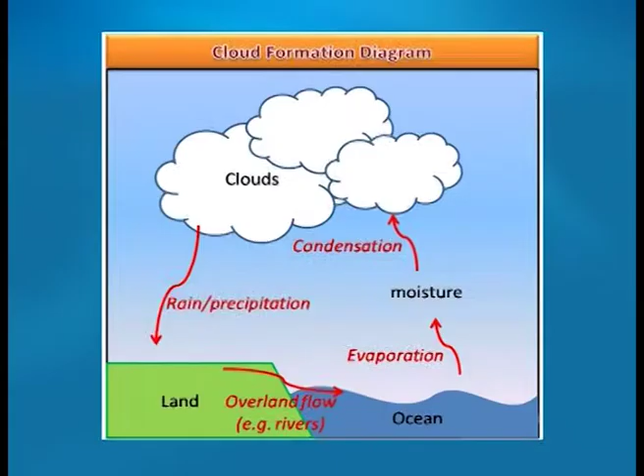Hydropower is a renewable energy resource because it uses the Earth's water cycle to generate electricity. Water evaporates from the Earth's surface, forms clouds, precipitates back to Earth, and flows towards the ocean. The movement of water as it flows downstream creates kinetic energy that can be converted into electricity.

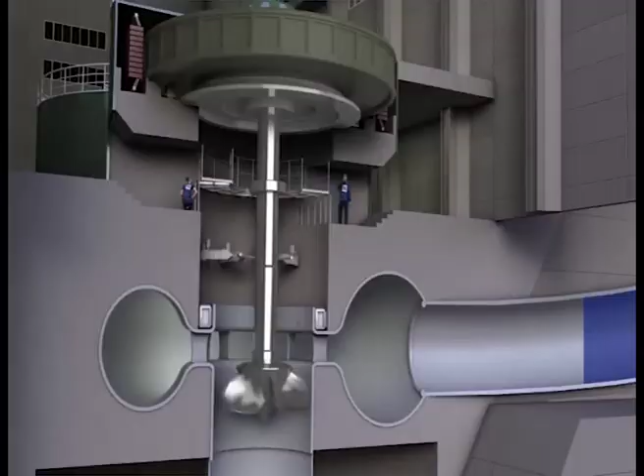On a worldwide standpoint, it is the most widely used form of renewable energy. Hydropower has been used for centuries by humans. Electricity is typically created when water is passed over large mechanical turbines. The water pressure forces the turbines to turn, and the mechanical energy created is then converted into electricity.

Hydropower has now become the best source of electricity on Earth. History proves that the cost of this electricity remains constant over the years. Because of the many advantages, most countries now have hydropower as a major source of electricity production.

The following aspects are highlighted in this lesson: hydroelectric power, and the potential of India in hydroelectric power.

Hydroelectric power is a renewable resource. The present installed capacity for hydroelectric power, as on September 30, 2013, is approximately 39,788.40 megawatts, which is 17.39% of total electricity generation in India.

Other renewable resources include geothermal, wave power, tidal power, wind power and solar power. Hydroelectric power plants do not use up resources to create electricity, nor do they pollute the air, land or water as other power plants may.

Hydroelectric power has played an important part in the development of this nation's electric power industry. Both small and large hydroelectric power developments were instrumental in the early expansion of the electric power industry.

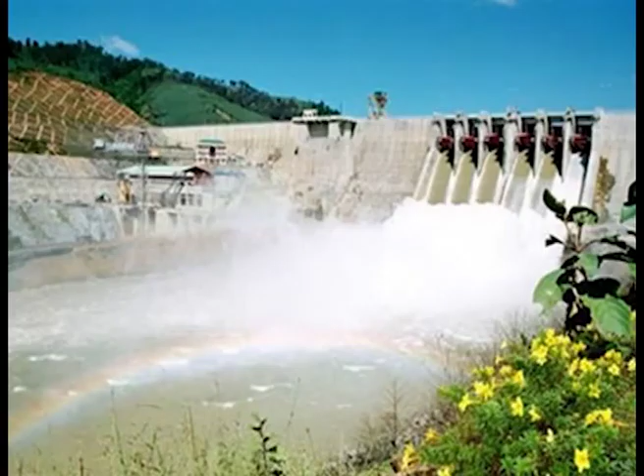Hydroelectric plants do not create air pollution. The fuel, falling water, is not consumed. Projects have long lives compared to other forms of energy generation. These favorable characteristics continue to make hydroelectric projects an attractive source of electric power.

Operating principles of hydroelectric power: hydroelectric power comes from flowing water, winter and spring runoff from mountain streams and clear lakes. The movement of water as it flows downstream creates kinetic energy that can be used to turn turbines and generators that produce electricity. The capacity to produce this energy depends on both the available flow and the height from which it falls.

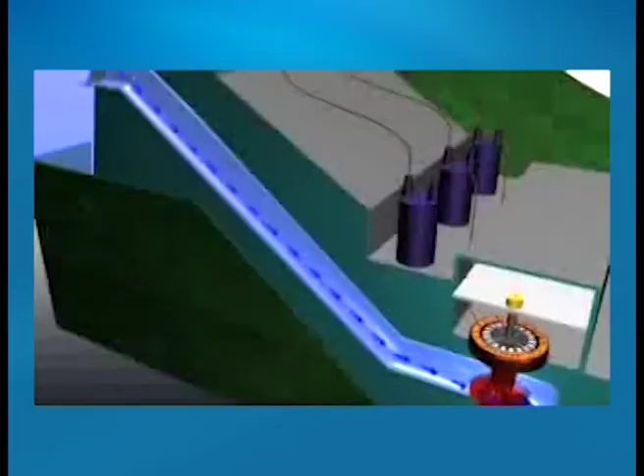The most common type of hydroelectric power plant uses a dam on a river to store water in a reservoir. Water released from the reservoir flows through a turbine, spinning it, which in turn activates a generator to produce electricity. But hydroelectric power doesn't necessarily require a large dam.

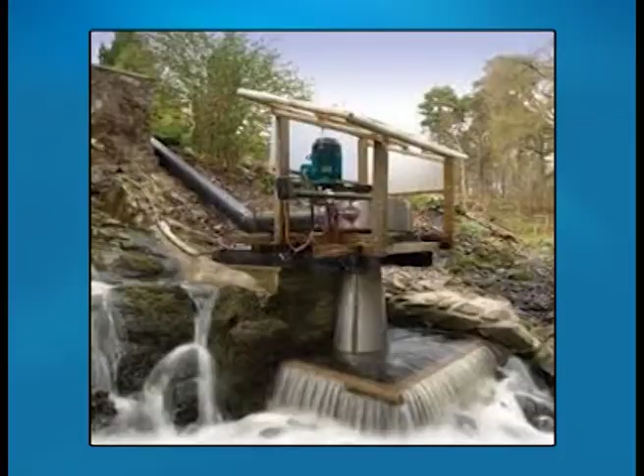Some hydroelectric power plants just use a small canal to channel the river water through a turbine. Another type of hydroelectric power plant, called a pumped storage plant, can even store power.

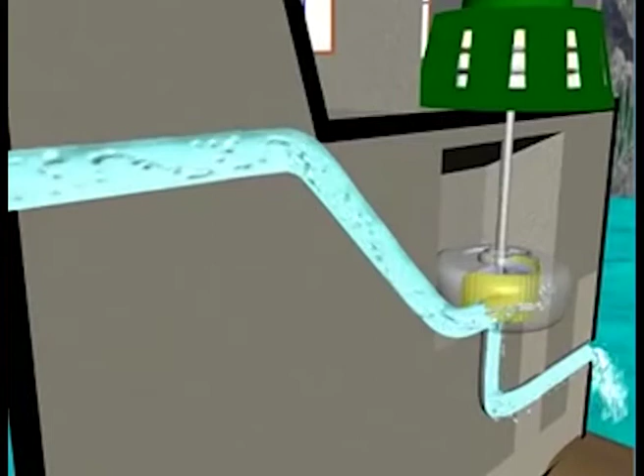The power is sent from a power grid into the electric generators. The generators then spin the turbines backward, which causes the turbines to pump water from a river or lower reservoir to an upper reservoir, where the power is stored.

To use the power, the water is released from the upper reservoir back down into the river or lower reservoir. This spins the turbines forward, activating the generators to produce electricity. A small or micro hydroelectric power system can produce enough electricity for a home, farm or ranch.

Hydroelectric power generation takes place at facilities called hydroelectric power plants. Some power plants are located on rivers, streams and canals, but for a reliable water supply, dams are needed.

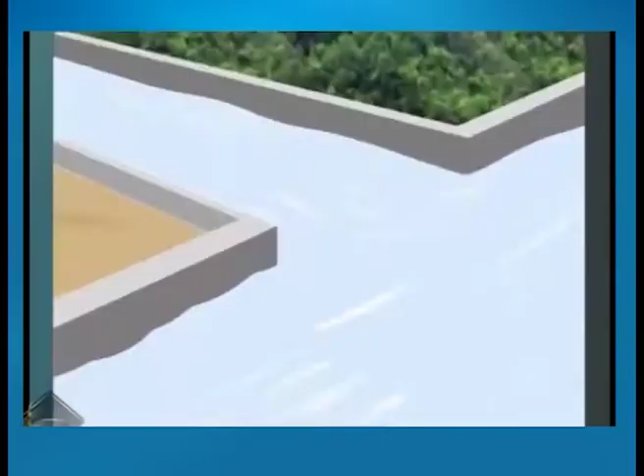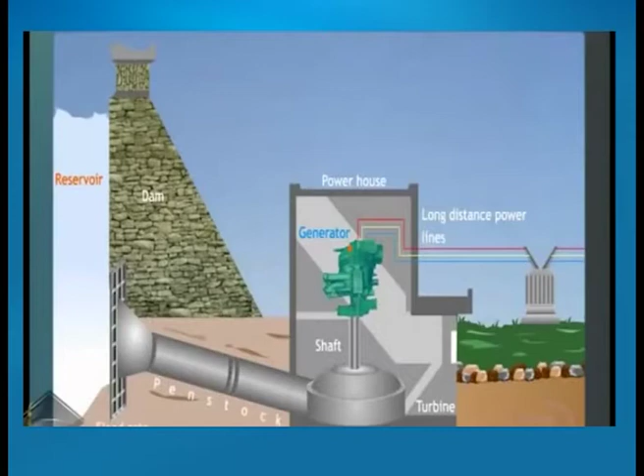Dams store water for later release for such purposes as irrigation, domestic and industrial use, and power generation. The reservoir acts much like a battery, storing water to be released as needed to generate power.

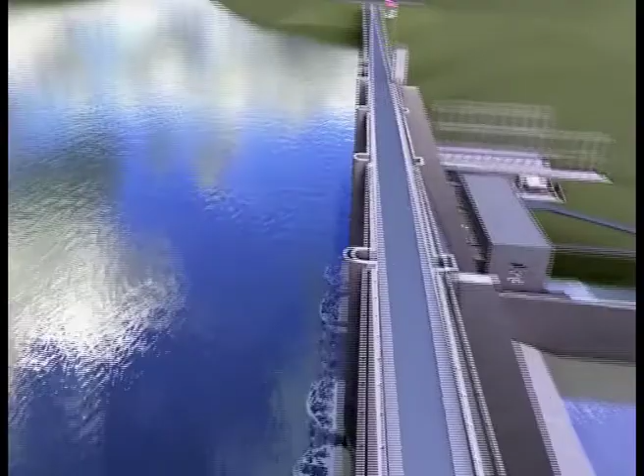To generate electricity, water must be in motion, since water is the initial source of energy. We call this hydroelectric power, or hydropower for short. The dam creates a head, or height, from which water flows. A pipe, called a penstock, carries the water from the reservoir to the turbine.

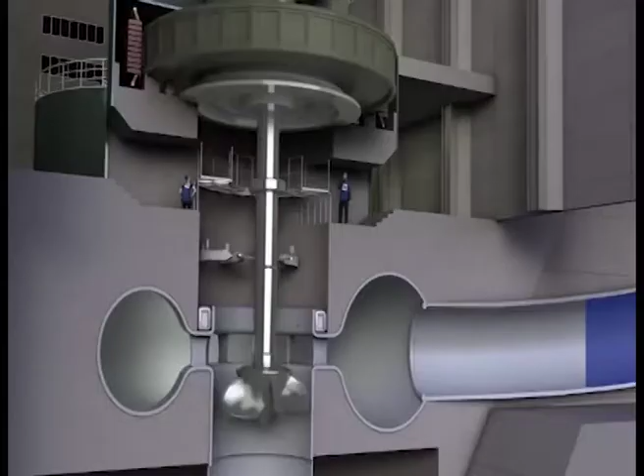The fast moving water pushes the turbine blades, something like a pinwheel in the wind. The water's force on the turbine blades turns the rotor, the moving part of the electric generator. When the coil of wire on the rotor sweeps past the generator's stationary coil, the stator, electricity is produced.

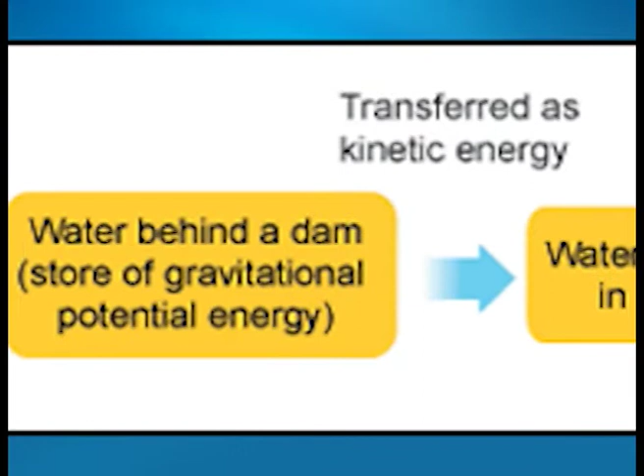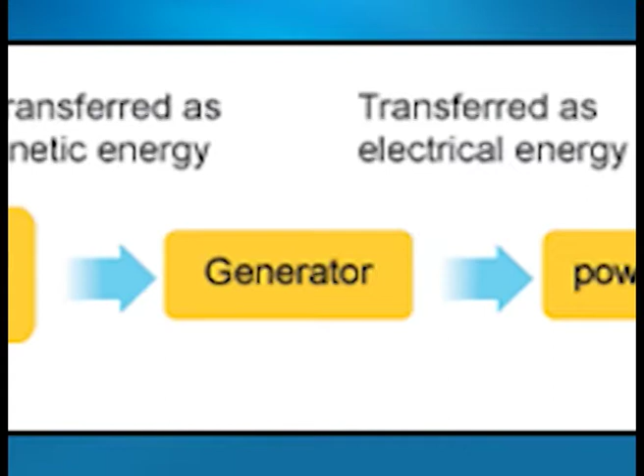The water flowing in the river possesses two types of energy: kinetic energy due to the flow of water, and potential energy due to the height of water. In hydroelectric power plants or dams, the potential energy of water is utilized to generate electricity.

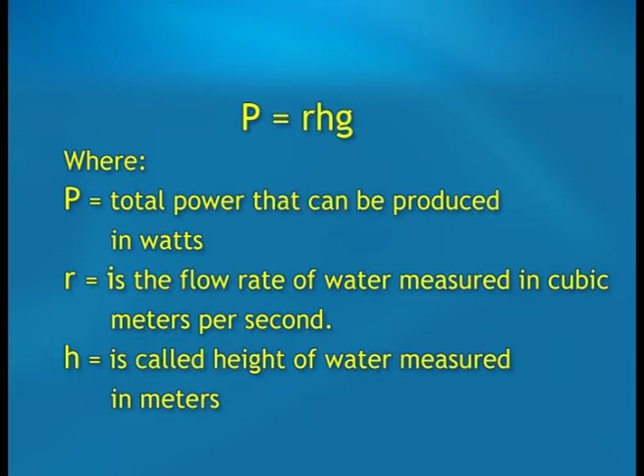The formula for total power that can be generated from water in a hydroelectric power plant due to its height is given by P equals RHG, where P is the total power produced in watts, R is the flow rate of water measured in cubic meters per second, and H is the height of water measured in meters. It is also called the head of water.

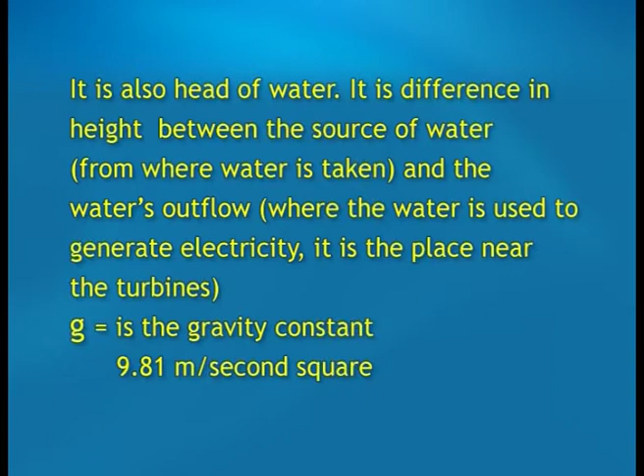It is the difference in height between the source of water, from where water is taken, and the water's outflow, where the water is used to generate electricity. It is a place near the turbines. G is the gravity constant, 9.81 meters per second squared.

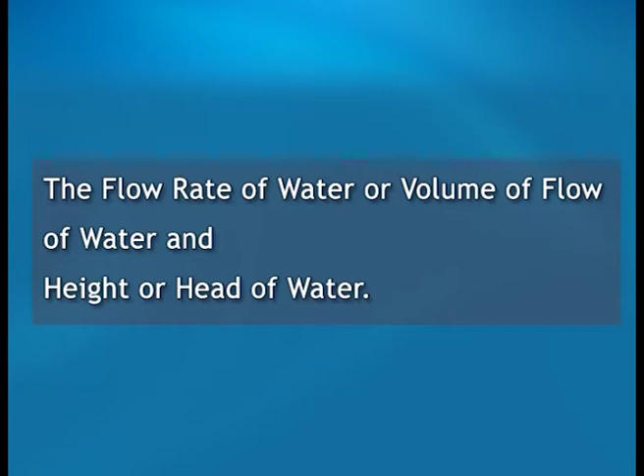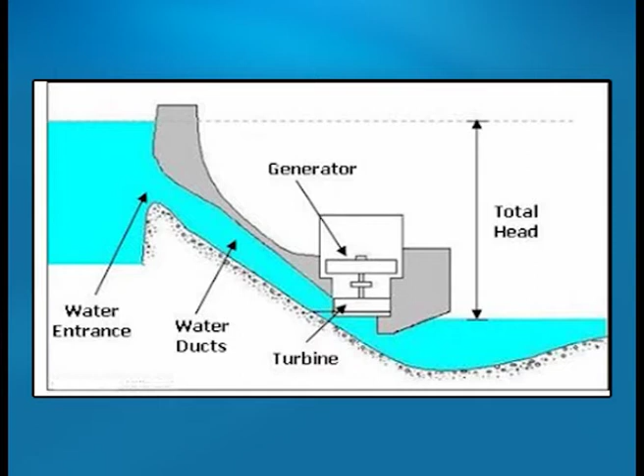The formula clearly shows that the total power that can be generated from hydroelectric power plants depends on two major factors: the flow rate or volume of water, and the height or head of water. The more the volume of water and the more the head of water, the more power is produced.

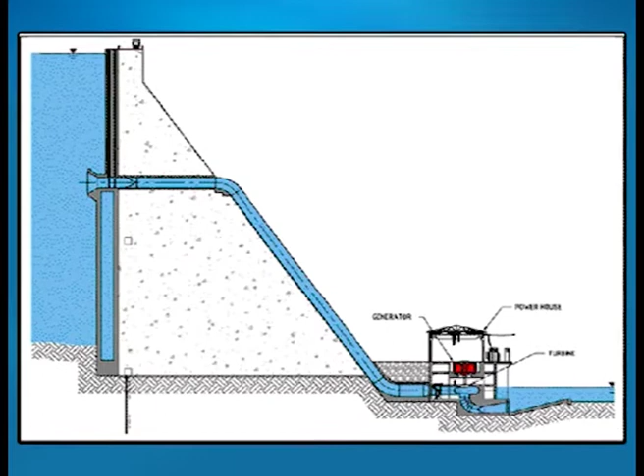To obtain a high head of water, the reservoir should be as high as possible and the power generation unit should be as low as possible. The maximum height of the reservoir is fixed by natural factors like the height of the river bed, the amount of water, and other environmental factors.

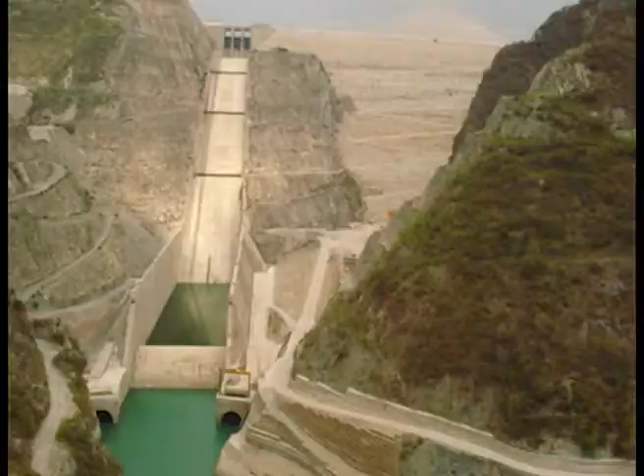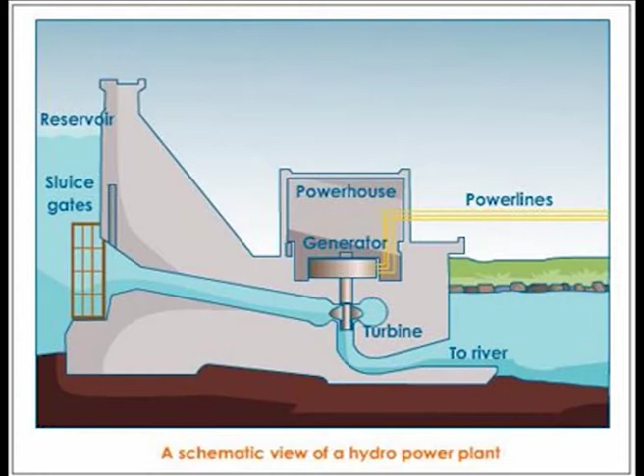The location of the power generation unit can be adjusted according to the total amount of power to be generated. Usually it is constructed at levels lower than ground level to get the maximum head of water. The total flow rate of water can be adjusted through the penstock as per requirements. If more power is to be generated, more water can be allowed to flow through it.

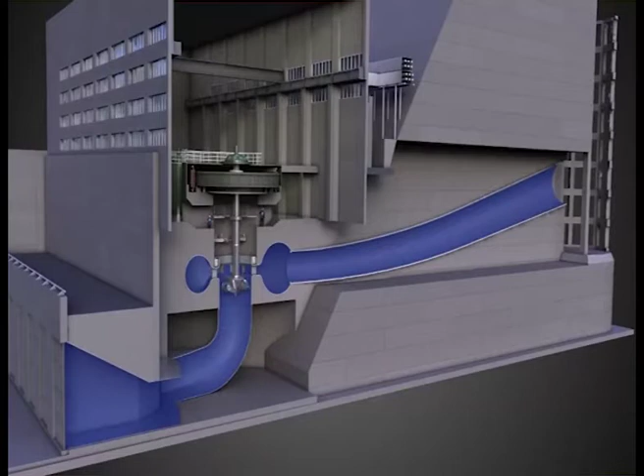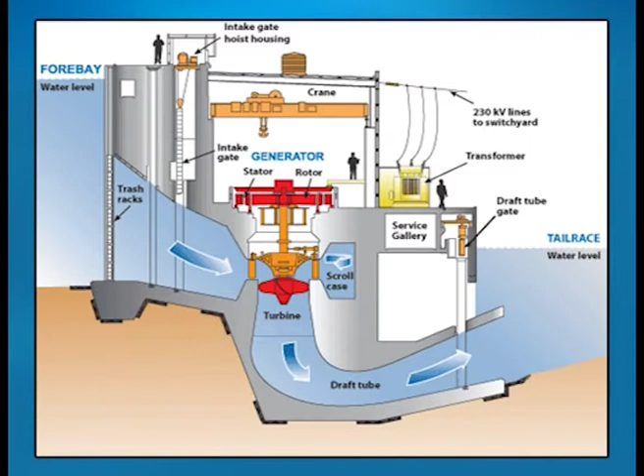Once electricity is produced, it must be delivered to distant locations such as offices and factories. Dams are often in remote locations, so power must be transmitted over some distance to its users. A vast network of transmission lines and facilities brings electricity to us in a usable form. All electricity made at a power plant first goes through transformers, which raise the voltage so it can travel long distances through power lines.

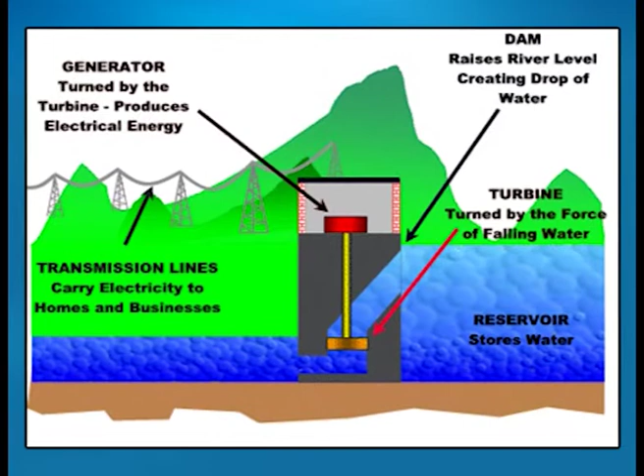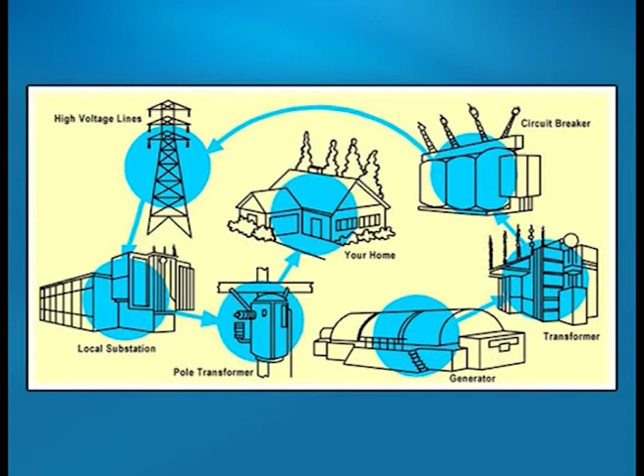Voltage is the pressure that forces an electric current through a wire. At local substations, transformers reduce the voltage so electricity can be divided up and directed throughout an area.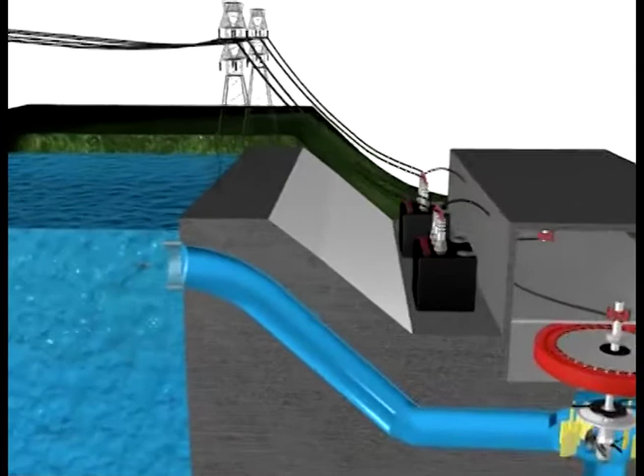Most hydroelectric power comes from the potential energy of dammed water driving a water turbine and generator. The power extracted from the water depends on the volume and on the difference in height between the source and the water outflow. This height difference is called the head. The amount of potential energy in water is proportional to the head.

To deliver water to a turbine while maintaining the pressure arising from the head, a large pipe called a penstock may be used.

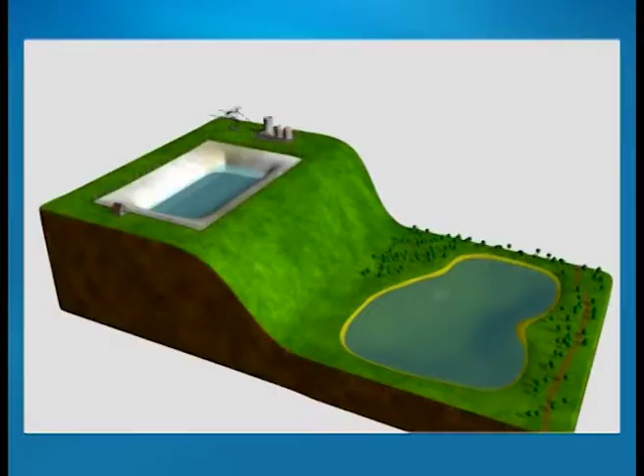This method produces electricity to supply high peak demand by moving water between reservoirs. At times of low electrical demand, excess generation capacity is used to pump water into the higher reservoir. When there is higher demand, water is released back into the lower reservoir through a turbine. Pump storage schemes currently provide the most commercially important means of large-scale grid energy storage and improve the daily capacity factor of the generation system.

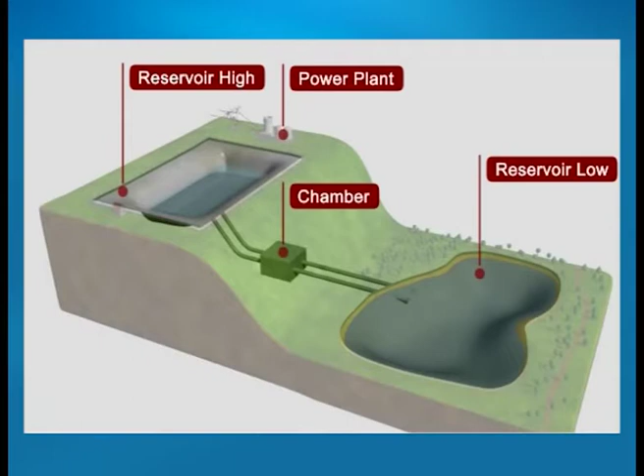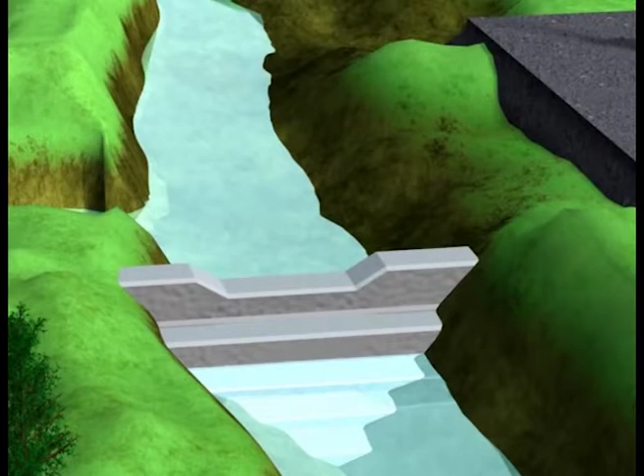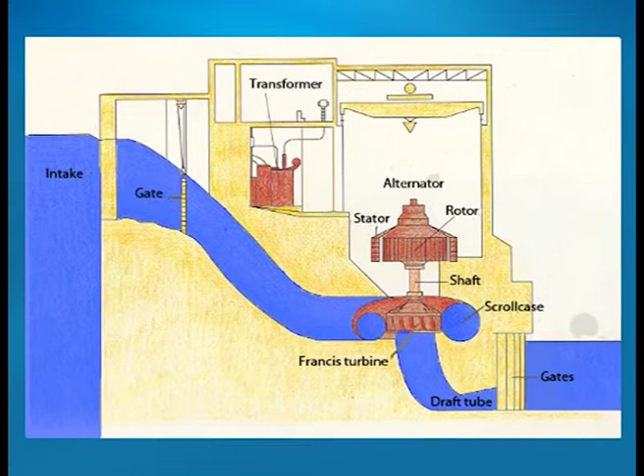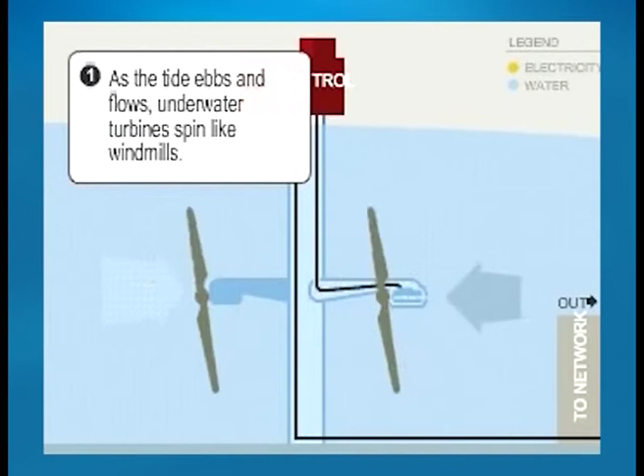Run-of-the-river hydroelectric stations have comparably smaller reservoir capacities, making it impossible to store water. A tidal power plant makes use of the daily rise and fall of water due to tides. Such sources are highly predictable, and if conditions permit, construction of reservoirs can also be dispatchable to generate power during high demand periods. Less common types of hydro schemes use water's kinetic energy from undammed sources, such as undershot water wheels.

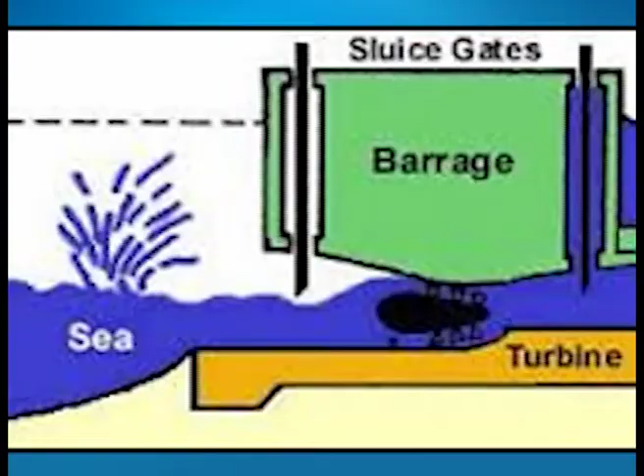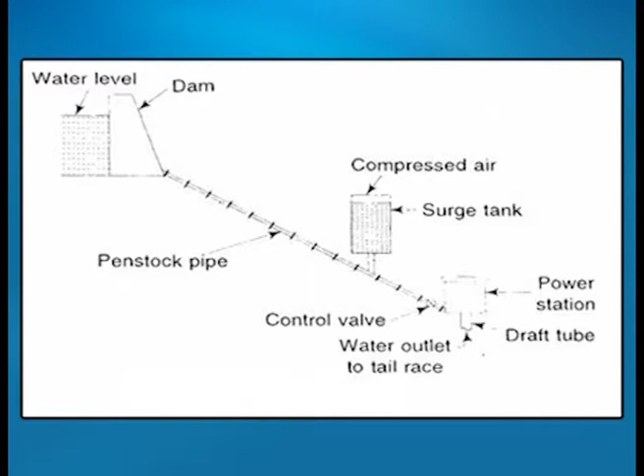Layout of hydroelectric power plants: the major components are the dam, barrage, and headworks, including power intake, head regulator, and desilting chambers; the head race tunnels or channels; the surge shaft or surge chambers; the pressure shaft or penstock; the underground and surface powerhouse; and the tail race channel or tail race tunnel.

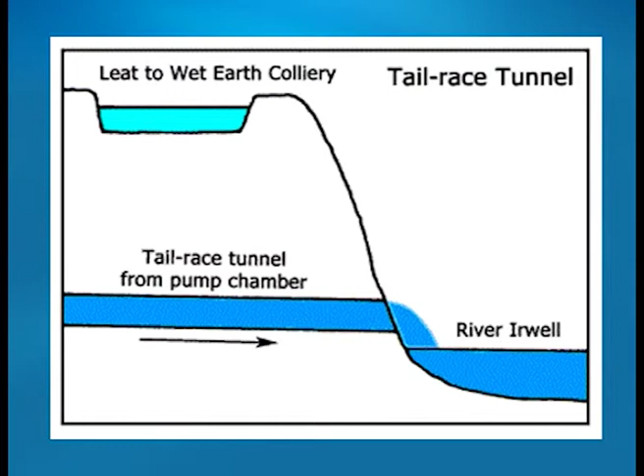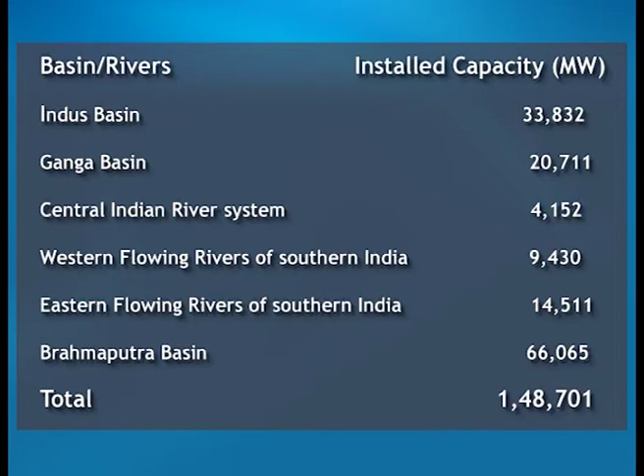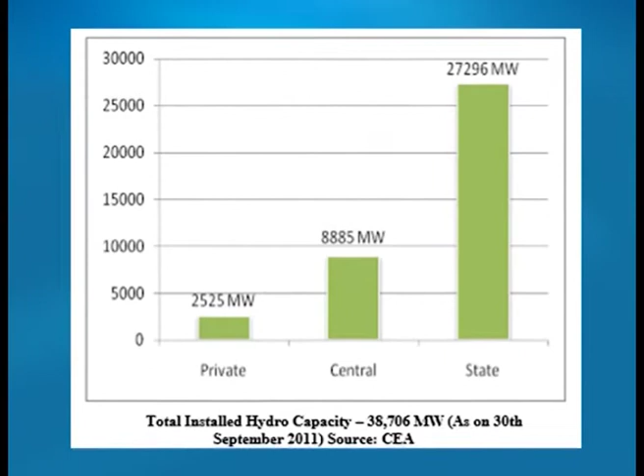Hydroelectric power: India has vast hydropower potential of over 84,000 megawatts, with the Brahmaputra, Indus and Ganges basins contributing about 80% of this total. India has harnessed only about 15% so far, another 7% is under various stages of development, and the balance 78% remains unharnessed due to many issues and barriers.

As on 1st October 2013, the hydropower potential in terms of installed capacity is estimated at 1,48,701 megawatts, out of which 1,45,320 megawatts of the potential consist of hydroelectric schemes having installed capacity of above 25 megawatts.

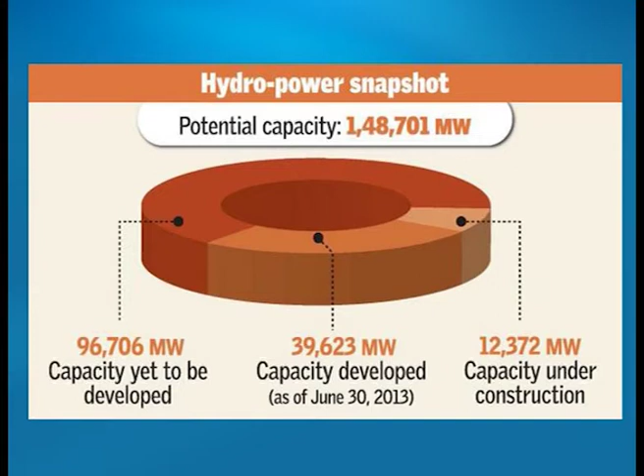Out of the 1,48,701 megawatts estimated potential of hydropower in the country, 39,788 megawatts is in operation as on 1st October 2013, which constitutes about 27% of the estimated hydropower potential and 17% of the total installed power capacity of the country, which stands at 2,28,722 megawatts. Hydropower in India.

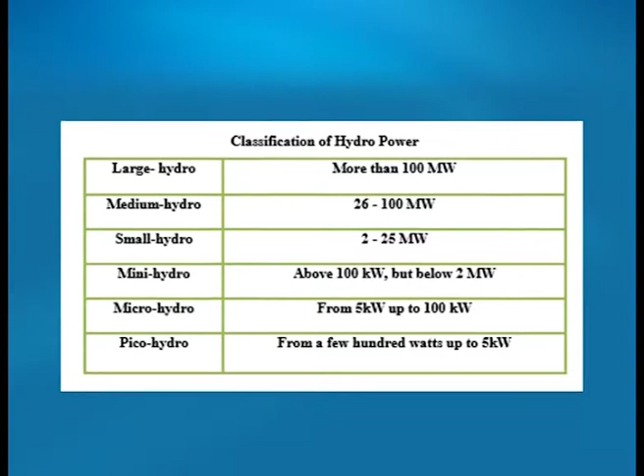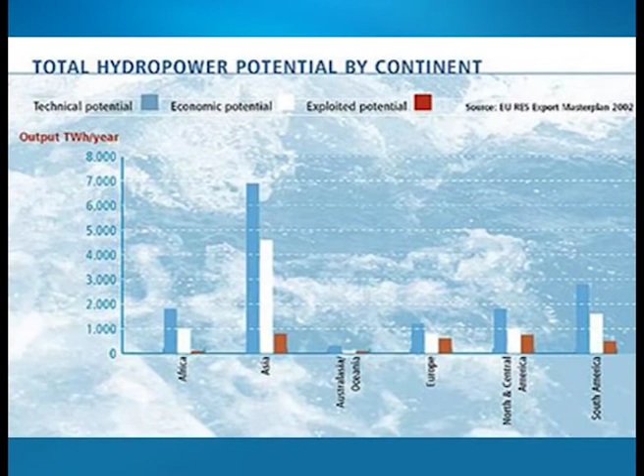India is blessed with an enormous amount of hydroelectric potential and ranks 5th in terms of exploitable hydro potential on the global scenario. As per assessment made by the Central Electricity Authority, India is endowed with economically exploitable hydropower potential to the tune of 1,48,700 megawatts of installed capacity.

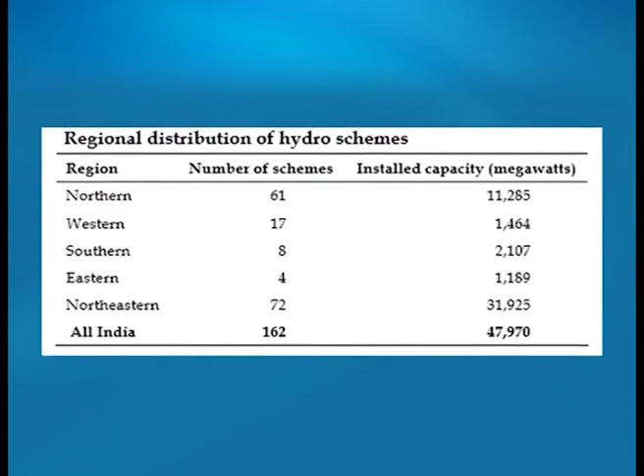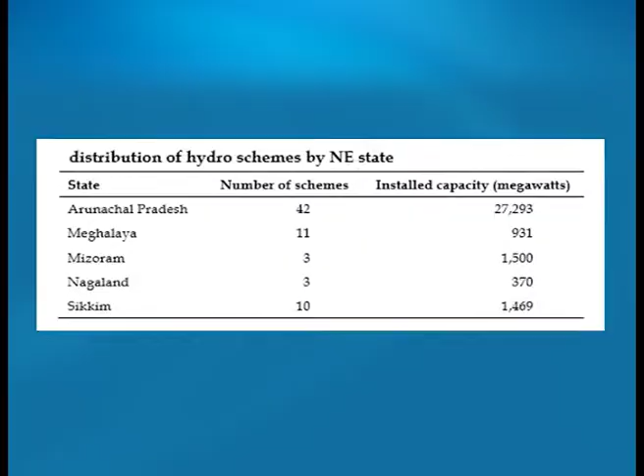India's hydropower system is divided into 5 major regions, namely the Northern region, Western region, Southern region, Eastern region and Northeastern region, with each region facing separate issues. The Eastern and Northeastern regions are power abundant, while the Northern and Western regions have greater power demands.

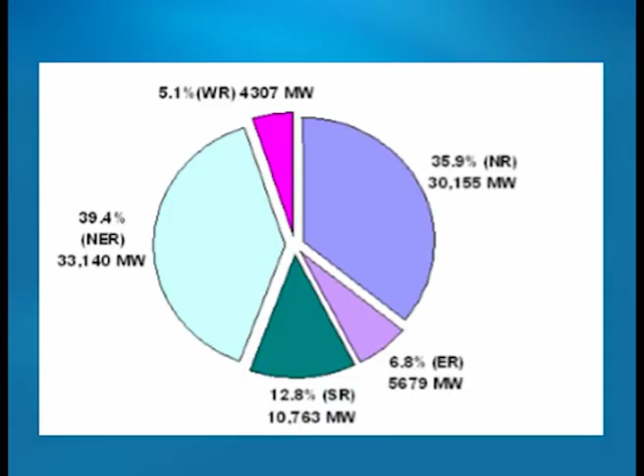The hydropower potential is largest in the Northeastern region, with 98% of it still untapped. The Northern, Eastern, Western and Southern regions have 79%, 77%, 23% and 33% unexploited hydropower potential respectively. A large part of the hydroelectric projects are concentrated in the northeastern states due to the availability of water and the required topography, but the demand for power in these areas is not significant.

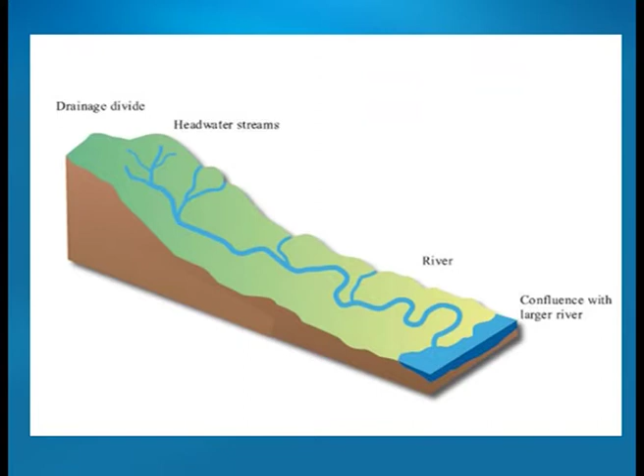River basins and their power potential: In basins, the water converges to a single point inside the basin known as a sink, which may be a permanent lake, dry lake, or a point where surface water is lost underground. The basin includes both the streams and rivers that convey the water as well as the land surfaces from which water drains into those channels, and is separated from adjacent basins by a drainage divide. The basin acts as a funnel by collecting all the water within the area it covers and channeling it to a single point. Each basin is separated topographically from adjacent basins by geographical barriers such as a ridge, hill or mountain.

Godavari Basin extends over an area of 3,12,812 square kilometers, which is about 9.5% of the total geographic area of the country. It is surrounded by the Satmala Hills, the Ajantha Range and the Mahadev Hills on the north, the Western Ghats on the west, and the Eastern Ghats on the east and south. The basin lies in the states of Maharashtra, Andhra Pradesh, Madhya Pradesh, Orissa and Karnataka.

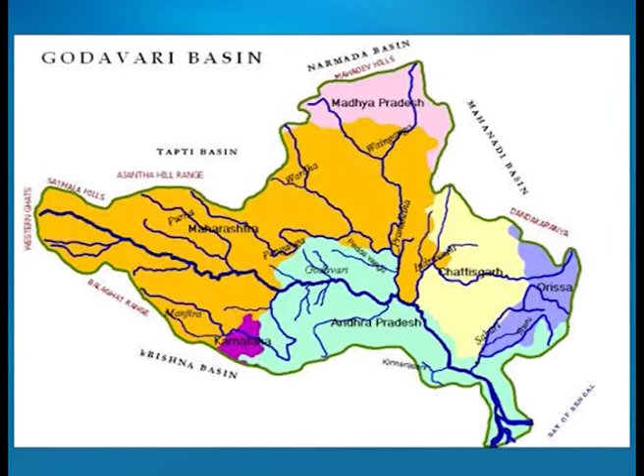The total state-wise distribution of the drainage area is 3,12,812 square kilometers. Black soils, red soils, laterites and lateritic soils, alluvium, mixed soils, and saline and alkaline soils are the important types of soils found in this basin. About 18.93 MHA is the cultivable area in the basin, which is about 9.7% of the total cultivable area of the country. As per the latest assessment, the hydroelectric power potential of the basin is 5091 megawatts at 60% load factor, and a large part of the potential is yet to be harnessed.

Krishna Basin extends over an area of 2,58,948 square kilometers, which is about 8% of the total geographical area of the country. It is surrounded by the Eastern Ghats on the south and east, and the Western Ghats on the west and north, bounded by the range separating it from the Godavari Basin. The basin lies in the states of Karnataka, Andhra Pradesh and Maharashtra.

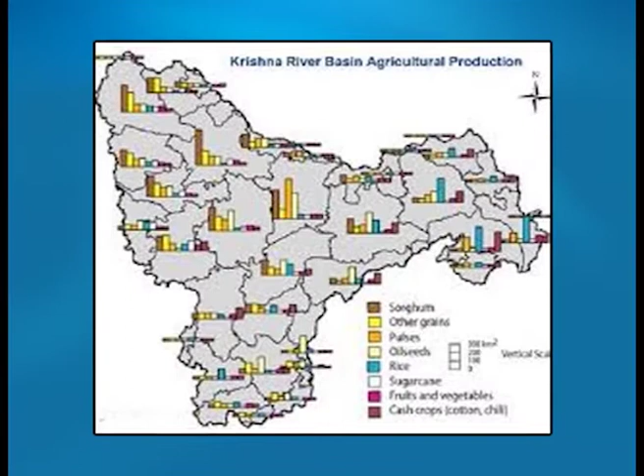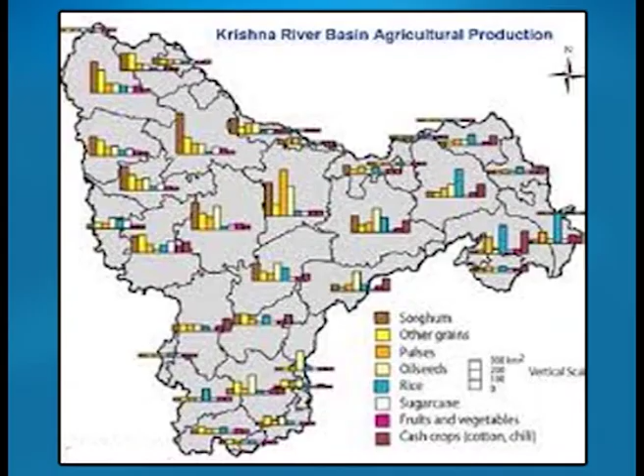The total state-wise distribution of the drainage area is 2,58,948 square kilometers. Black soils, red soils, laterites and lateritic soils, mixed soils, and alluvium soils are the important types of soils found in this basin. About 20.3 MHA is the cultivable area in this basin, which is about 9.7% of the total cultivable area of the country. As per the latest assessment, the hydroelectric potential of the basin is 2997 megawatts at 60% load factor.

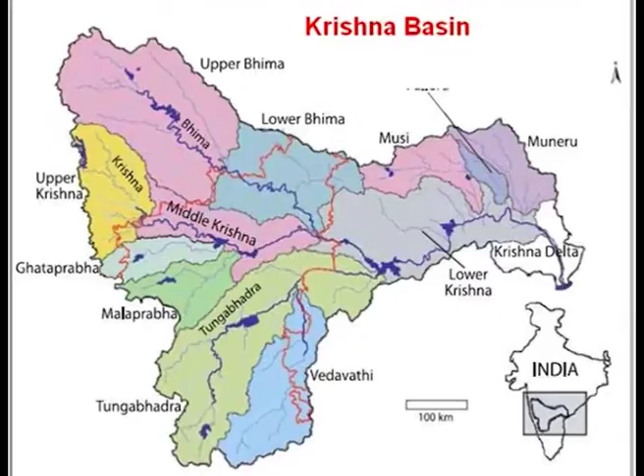Brahmaputra Basin: this basin extends over an area of 552,000 square kilometers, lying in Tibet, China, Bhutan, India and Bangladesh. It is surrounded by the Himalayas on the north, the Patkai range of hills running along the Assam-Burma border on the east, the Assam range of hills on the south, and on the west by the Himalayas and the ridges separating it from the Ganga sub-basin.

This basin lies in the states of Arunachal Pradesh, Assam, Meghalaya, Nagaland, Sikkim and West Bengal. The drainage area lying in India is 1,94,413 square kilometers.

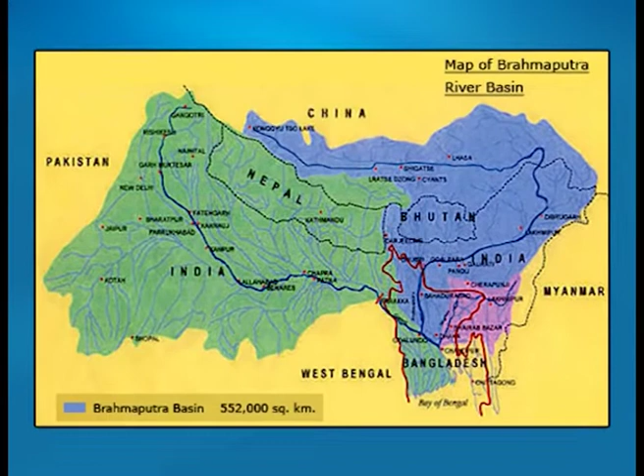The type of soil found in this sub-basin is red loamy soil and alluvial soil, sandy, clayey soils, and laterite soils. About 12.15 MHA is the cultivable area of the sub-basin, which is about 6.2% of the total cultivable area of the country. This sub-basin has an abundant hydropower potential.

As per the latest assessment, the hydropower potential of the sub-basin is 31,012 megawatts at 60% load factor, which is almost 37% of the country's hydropower potential.

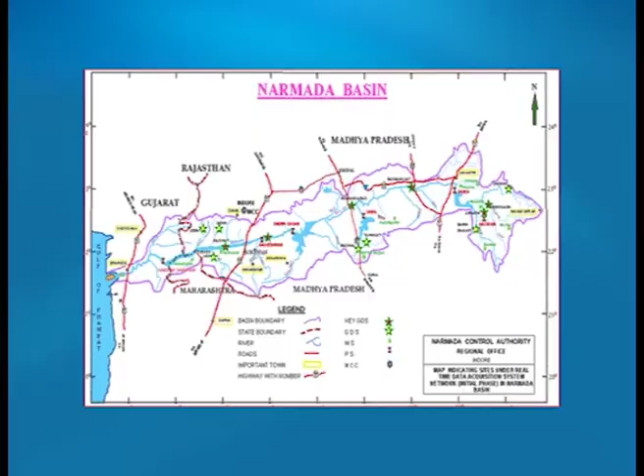Narmada Basin. 3% of the total geographical area of the country is covered by the Narmada Basin, which has an area of 98,796 square kilometers. It is surrounded by the Vindhyas on the north, the Maikala range on the east, Satpura on the south, and the Arabian Sea on the west.

The basin lies in the states of Madhya Pradesh, Gujarat and Maharashtra. Black soils are predominant in the basin. About 5.9 MHA is the cultivable area of the basin, which is 3% of the total cultivable area of the country. The hydroelectric power potential of the basin is 1,450 MW at 60% load factor, as per the latest assessment.

The area covered by the Mahanadi Basin is 1,41,589 square kilometers, nearly 4.3% of the total geographical area of the country.

It is bounded by the central India hills on the north, the Eastern Ghats on the south and east, and the Maikala range on the west. The states which come under this basin are Madhya Pradesh, Orissa, Bihar and Maharashtra.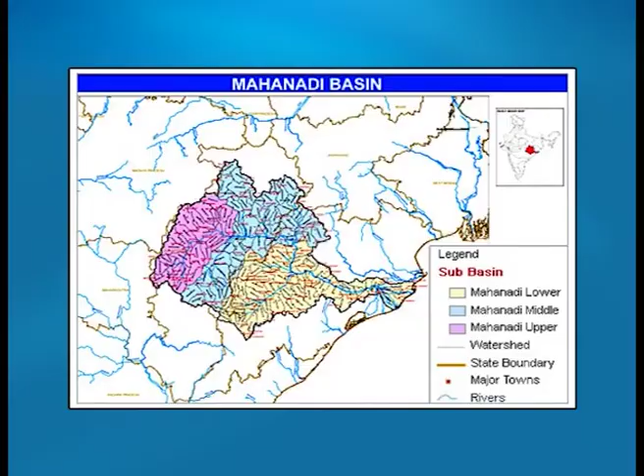The types of soil found in this basin are red and yellow soils, mixed red and black soils, laterite soils, and deltaic soils. About 7.99 MHA is the cultivable area of this basin, which is about 4% of the total cultivable area of the country.

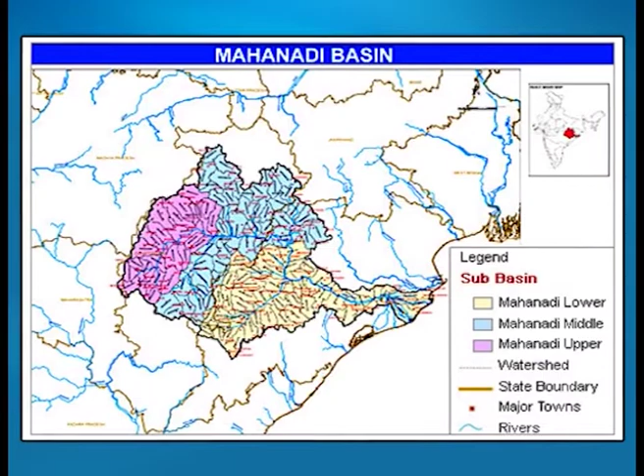The hydropower potential of the basin is 627 megawatts at 60% load factor.

Hydropower development issues. The slow development of hydropower in India can be attributed to many factors, and these factors are discussed in the following sessions.

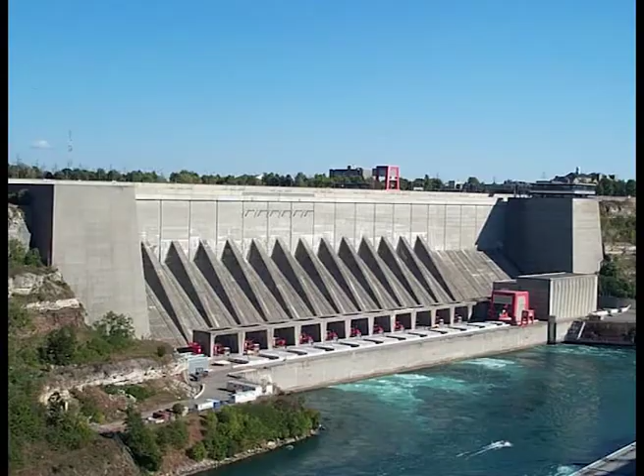Environmental issues. Deforestation and rehabilitation are the main problems linked with hydropower projects requiring rehabilitation and resettlement, and measures for project affected people.

Environmental impacts should therefore be properly assessed and addressed, keeping in view the needs of the people, to avoid delays in execution of the project. Environmental impact assessment studies and plans to mitigate the same should be carried out.

A mechanism of compensatory afforestation should be planned for quicker clearance of the project. Compensatory measures for project affected people should also be planned as per guidelines to expedite project clearance.

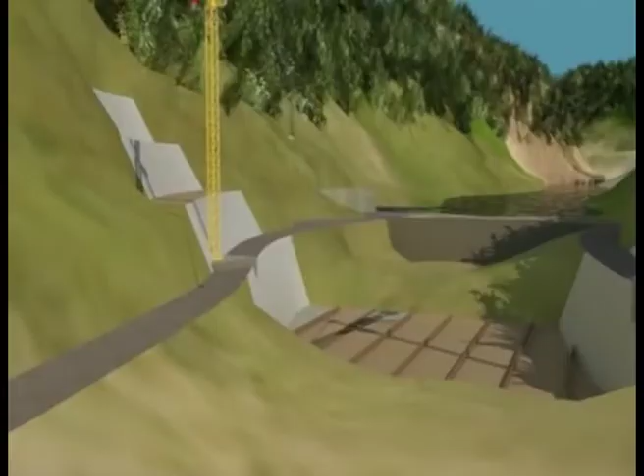Land acquisition. Hydro projects generally suffer delays due to land acquisition problems. Landowners often demand employment and heavy compensation in some of the power stations.

The major Indian rivers generally flow in stretches involving more than one state, requiring concurrence of all the involved states for taking up hydro projects. In a number of projects, although the same could be resolved through mutual cooperation and intervention of specialized agencies, a number of hydropower projects are still languishing due to interstate disputes.

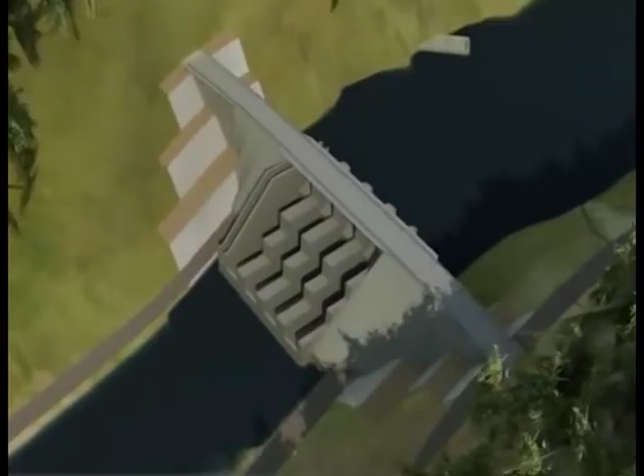Vast hydro potential of the country is available in areas affected by insurgency and militant problems. The law and order problem in such areas leads to delay in execution of the project as well as cost overruns. Executing agencies face security problems, resulting in delays due to difficulties in arranging manpower deployment.

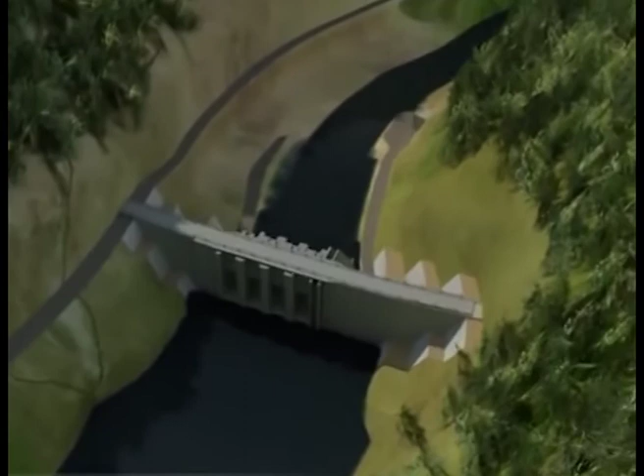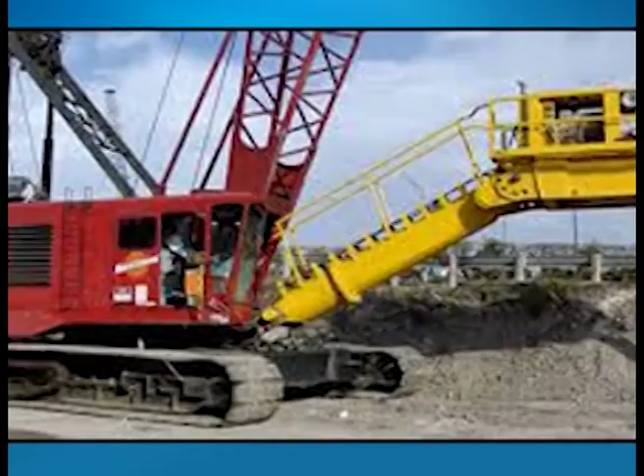Thorough geotechnical investigations at the time of preparation of the DPR are required to avoid time and cost overruns. However, due to site constraints and prohibitive cost involved, it sometimes becomes difficult to carry out thorough investigations, resulting in geological surprises during execution of the project, leading to delays in commissioning.

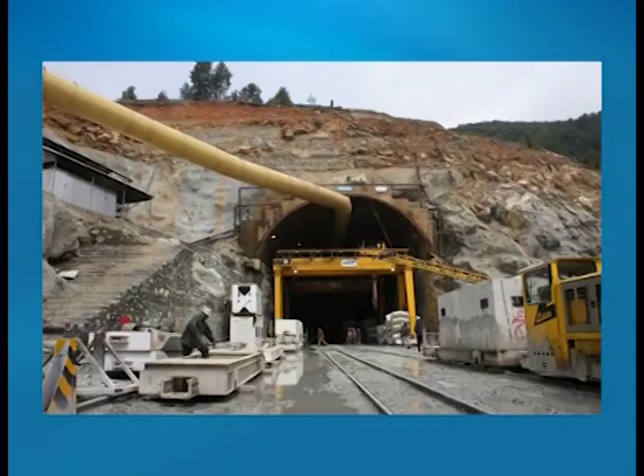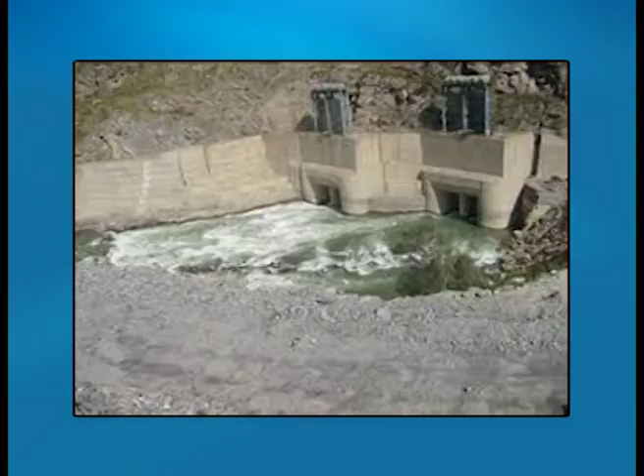Funds constraints. Fund constraints is the most important factor leading to delays in execution of projects in a number of states. Projects taken up without tie-up of resources from concept to commissioning suffer from such constraints.

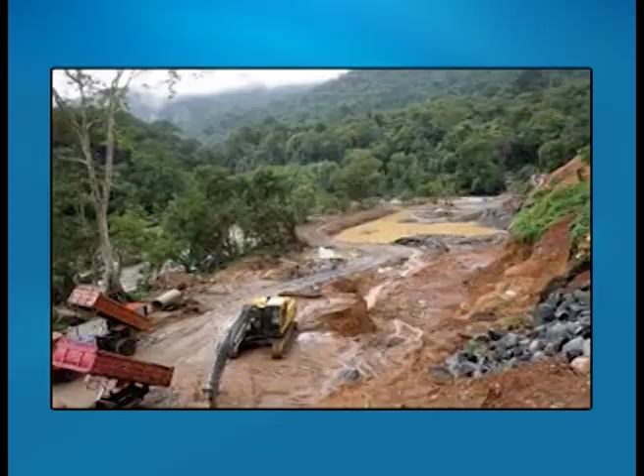Natural calamities. As hydro projects are located in hilly terrains, landslides, hill slope collapses, road blocks etc., particularly during monsoon season, because of heavy rains and unprecedented floods, cause severe setbacks in construction, leading to time and cost overruns.